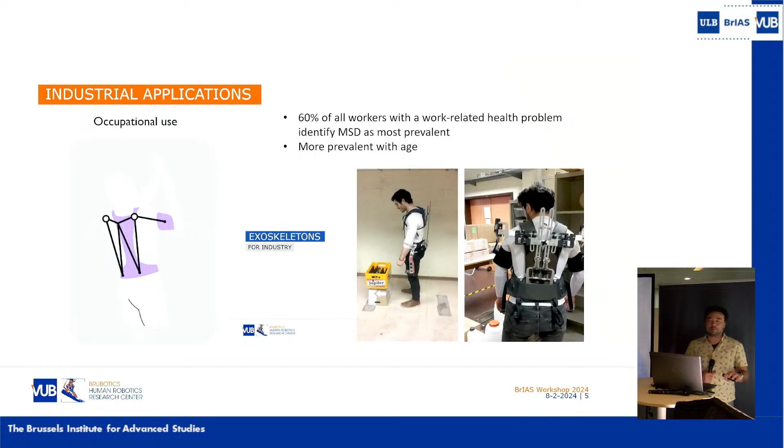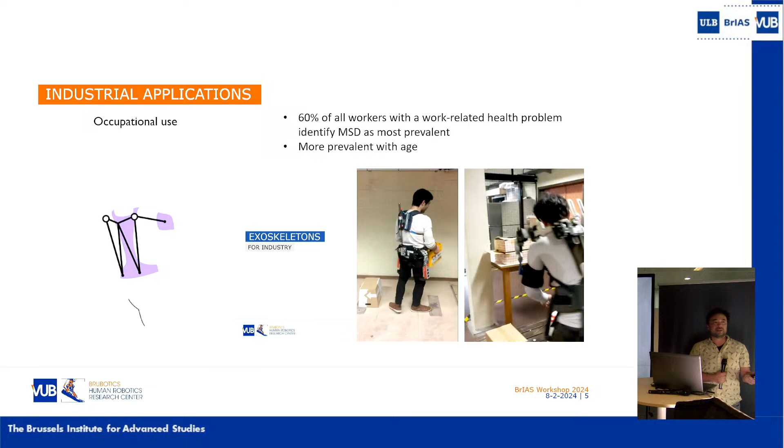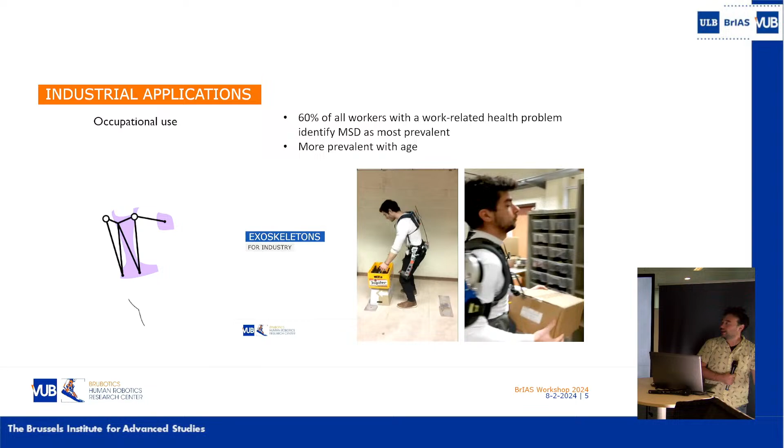So, the first thing I'd like to talk about are exoskeletons. We work on things like industrial applications - these two here, one is the back exoskeleton and one is an upper arm exoskeleton. These are really for industrial applications, workers in the field that are going to be doing work with the devices. This is not where I primarily have been working, but it's something we have been doing for a while, and we have a spin-off that's going to come out of this work pretty soon.

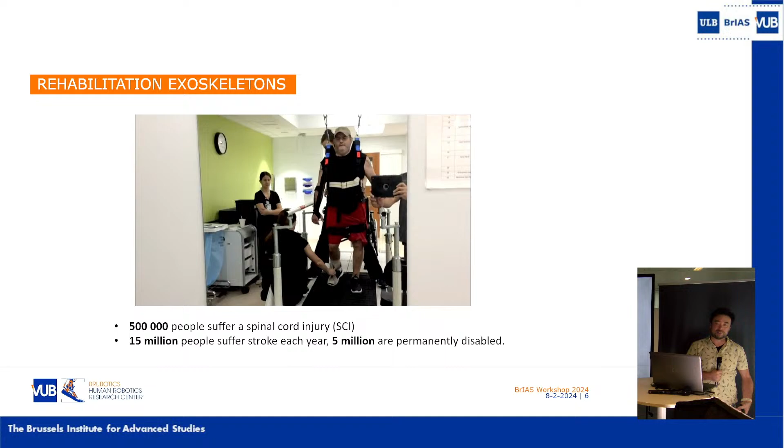But really, where I'm working right now is rehabilitation exoskeletons. A lot of people every year have problems, neurological problems or problems with muscle weakness. And the rehabilitation techniques used for these people are very labor intensive and costly, often requiring a lot of people to get very little result or little time with these people.

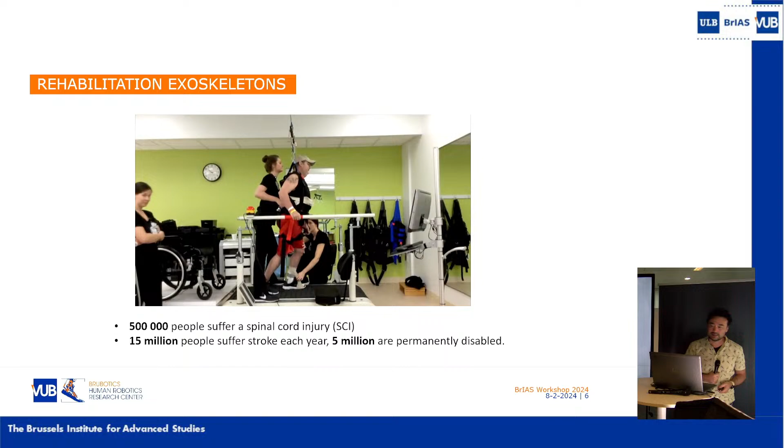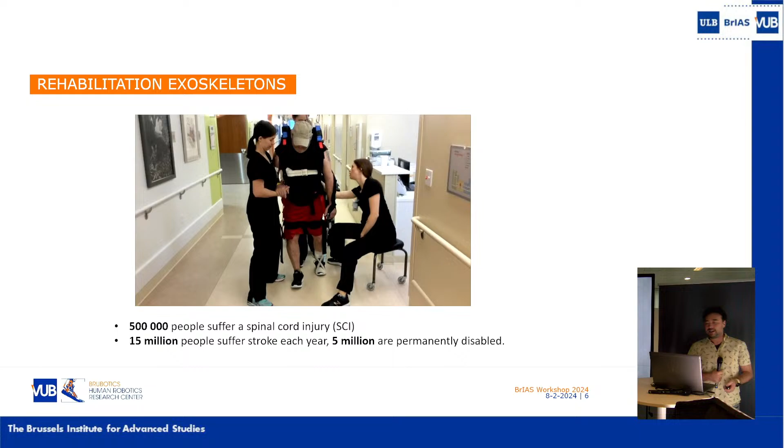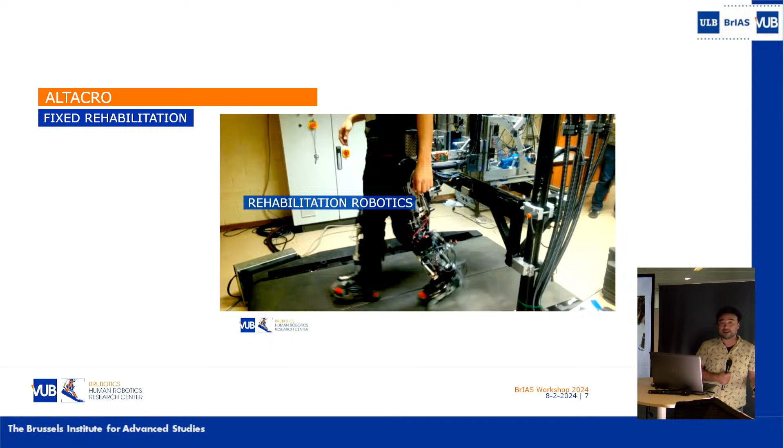You can see in some of these videos you have 2 or 3 PT workers with one individual for their half hour of time on the treadmill, and that's basically the rehabilitation they're able to get. So one of the first things we worked on at the lab were these kinds of fixed rehabilitation devices, exoskeletons that would be able to help a person ambulate who might not be able to, replacing the need for so many individuals looking after people during rehabilitation, and also upping the number of repetitions people are able to get.

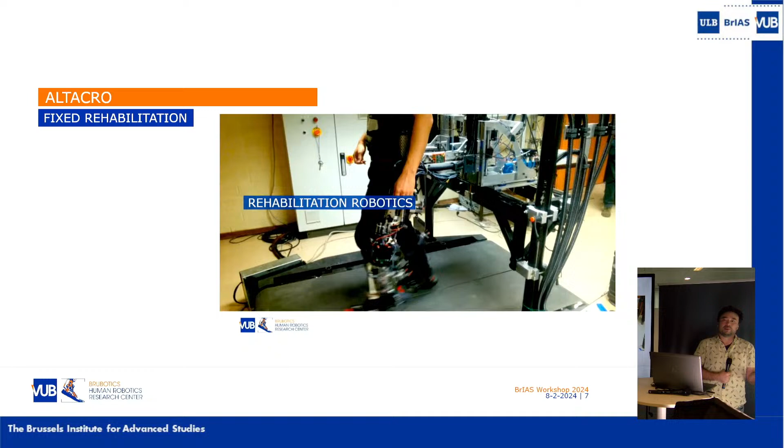This one is called Altacro, but you can see it's very hard to move from this to something that's actually useful in daily life. This is something that would be for a clinic - you would treat people in it.

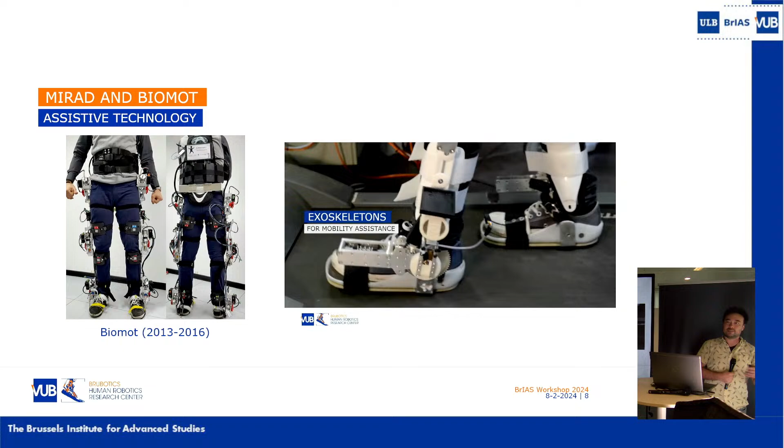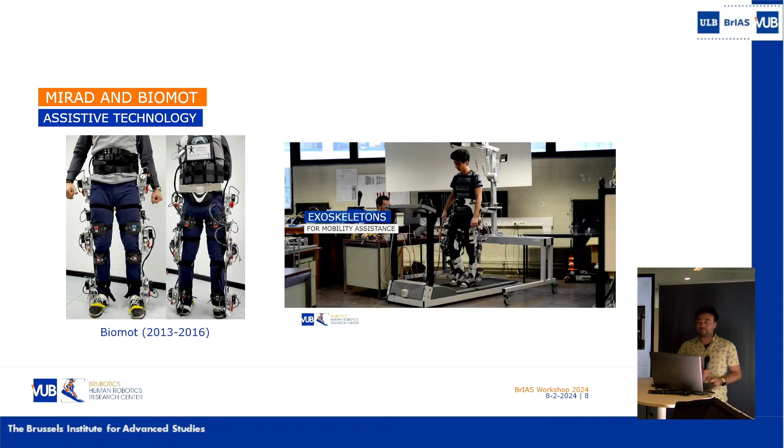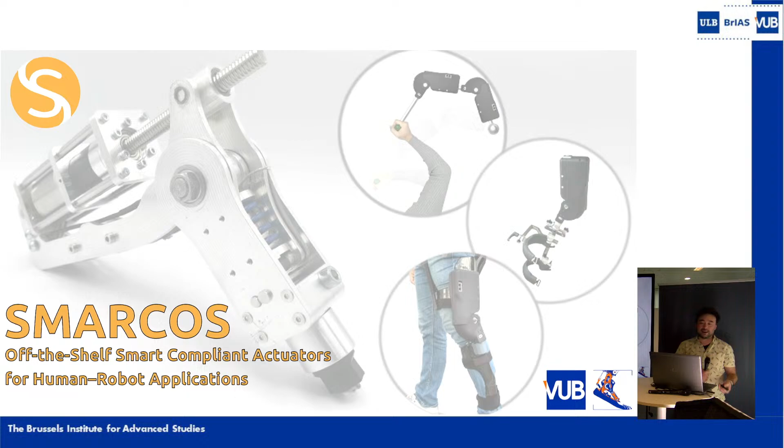We also work on different actuator technologies. We have a general purpose SMARCOS actuator, which was used for a number of different applications in rehabilitation - here we have an arm rehabilitation device. One of the things about all of our systems is that we really believe in having series compliance, natural compliance in your system, to better interact with the person.

So we deal a lot with designing actuators that are made to interact with humans while they're going through their rehabilitation scenarios.

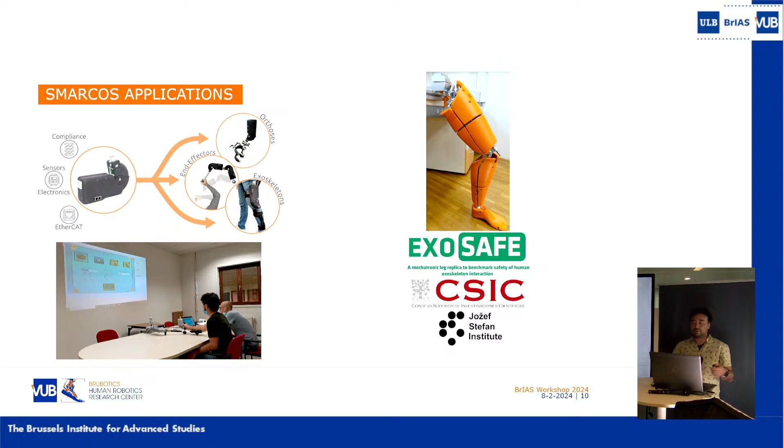Currently we have a new project called RevalExo, which we're trying to solve some of the problems of our previous devices, but also this one is intended to not only do rehabilitation for a person, but to also provide assistance at the same time.

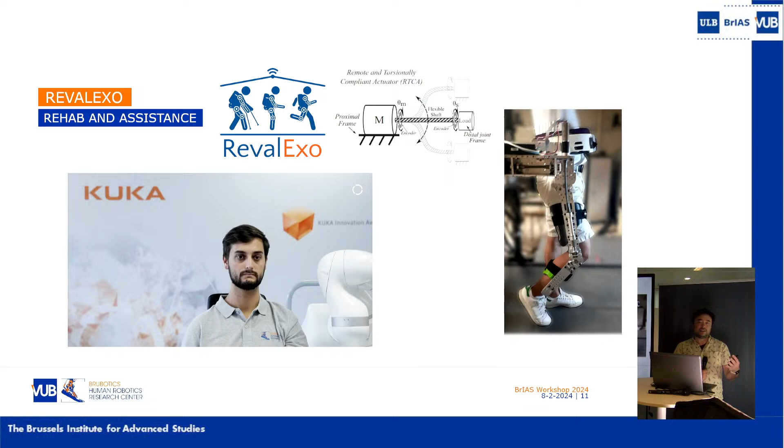So we'll have one that, for example, for sarcopenia patients whose muscle decline will definitely get worse over time, and that's just a matter of time. So they might need assistance at the beginning that's very light, but also because they can rehabilitate at the same time, they can keep their muscle function for a longer period of time as well with our device. At least that's the idea.

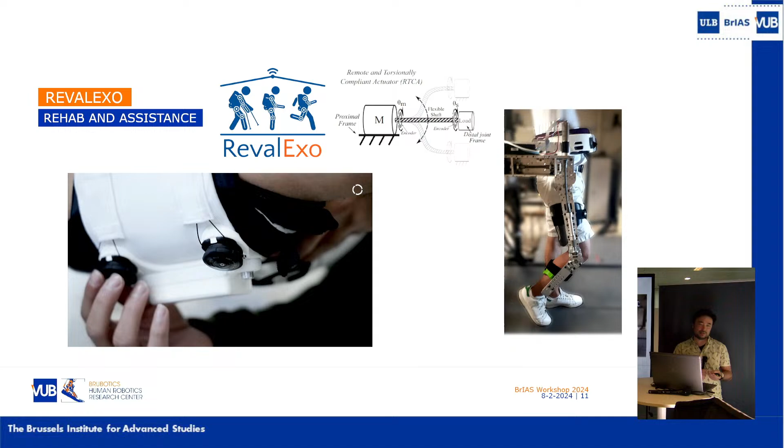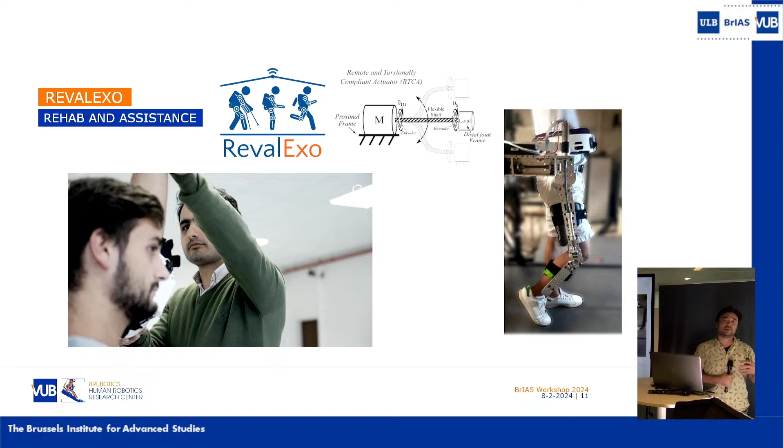So we hope to help individuals retain muscle function for longer by using it in a rehabilitation scenario as a resistance trainer. And then eventually a more assistive role will become of our device.

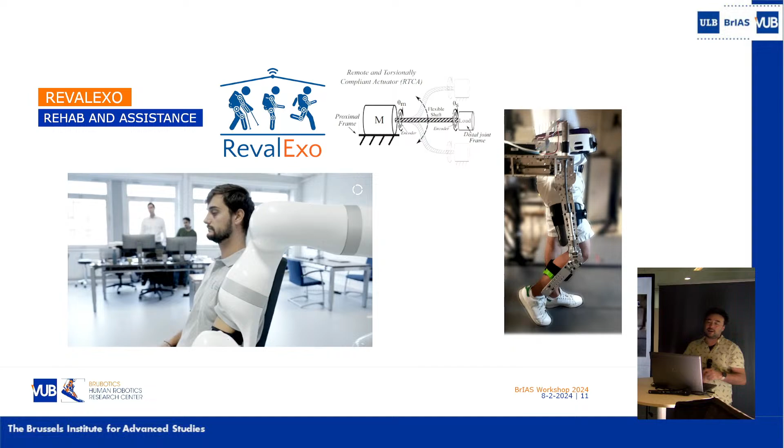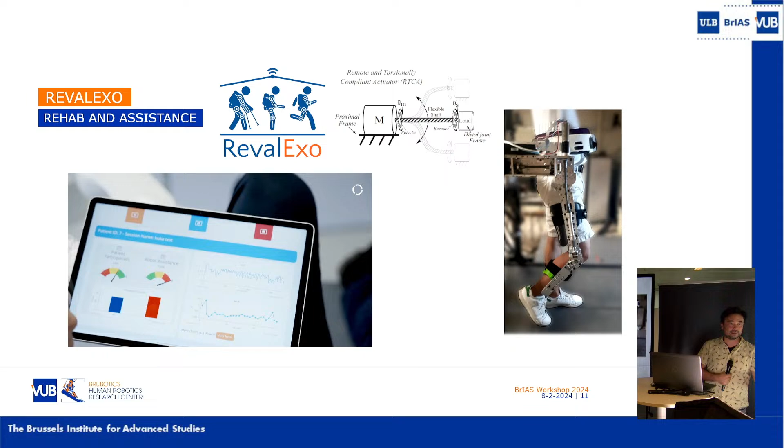So we have a number of different systems that we're looking at to incorporate in this RevalExo exoskeleton. One of them being the remote cable transmission, seen up here in the upper right. We implemented a version of this on our stationary exoskeleton, but it allows us to play with where the position of mass is on the person. So we don't have our mass very distal on the legs, which can be very tiring and give people problems. So it can move a lot of the electronics, a lot of the weight to their waist while operating at distal joints like the knee and the ankle.

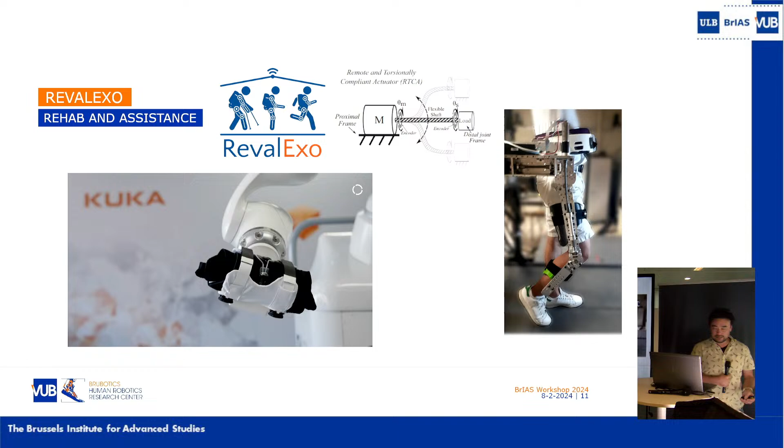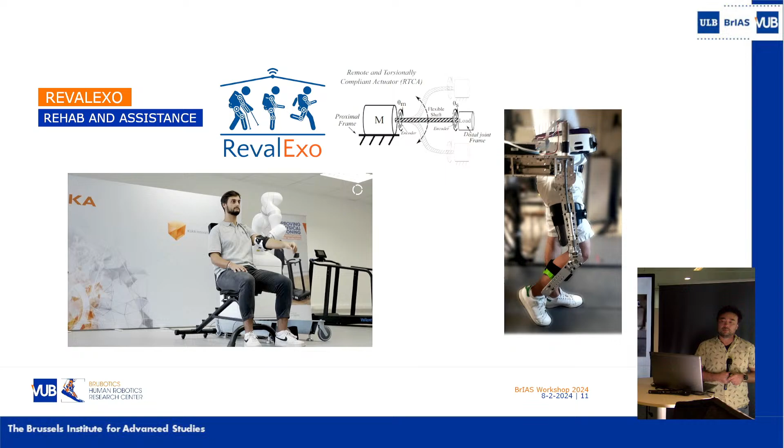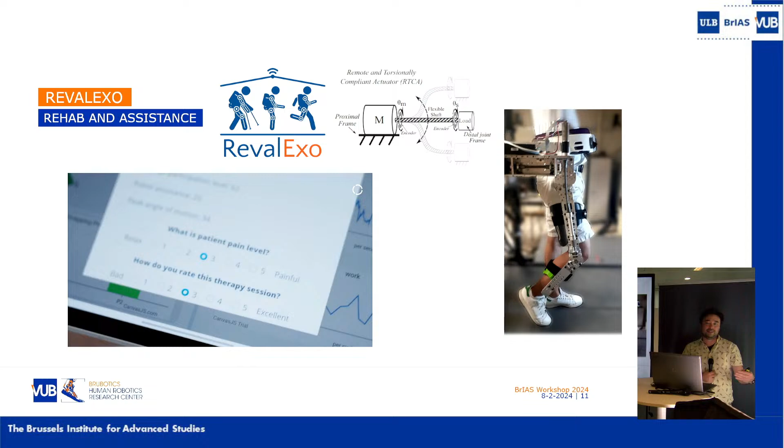Another thing that we're incorporating into our project here, the video you're seeing is from SAFER. It's a project that looked at the interfaces between the person and the robot. In this case, they're looking at it for measuring how the robot is pushing on the person. And we're trying to incorporate these kinds of sensors within cuffs in order to better provide assistance with our exoskeleton, so sensorized interfaces.

Yep, we also have prostheses. So prostheses is another large section of our work here at the VUB.

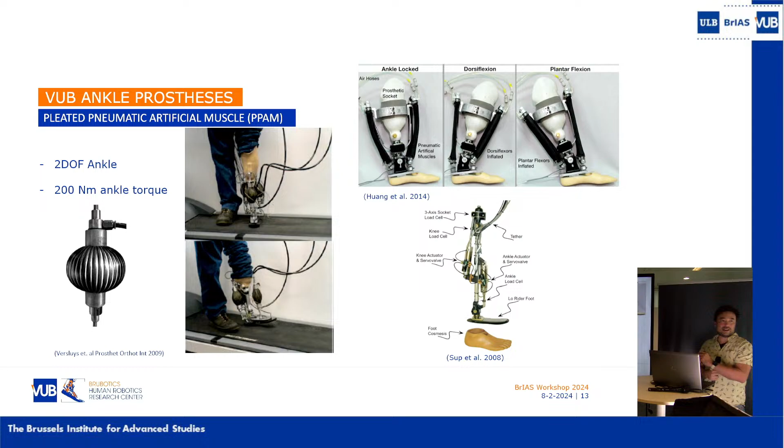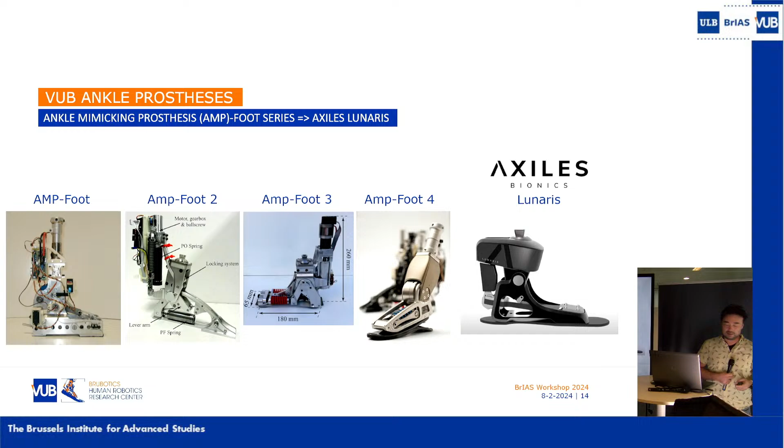And in fact, it's one of the first things that was done here. A long time ago, they were working on pneumatic actuators, and they built a pneumatic actuated ankle prosthesis at that time. And this kind of grew into what was known as the AMP-Foot line, which led to our spinoff called Axiles. And the project that I started here on, which was called CyberLegs, which is a full knee and ankle prosthesis.

So it's a full robotic prosthesis where we would play around with things like energy transfer from the knee to the ankle, different actuation techniques, such as using what we call the MACCEPA actuator, which is a variable stiffness actuator. And so throughout the CyberLegs project, we came up with a series of different prostheses in order to explore different ways of interacting with the person through replacing their leg.

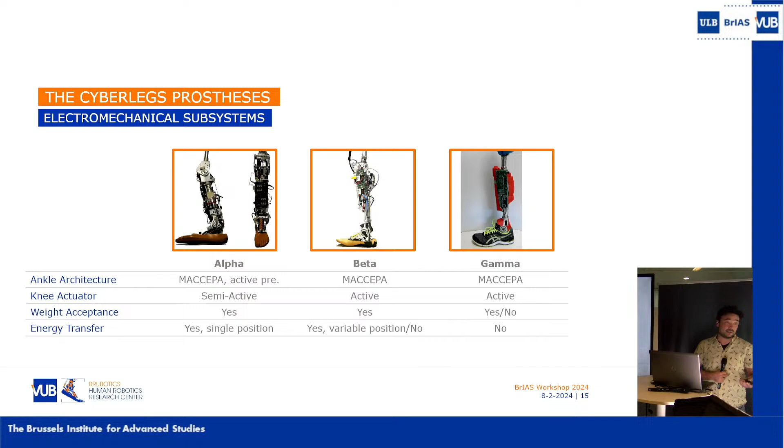So the current design is the CyberLegs X-Leg, our most recent design. But the idea was to simplify a lot of our older CyberLegs devices by replacing, for example, the 2 springs in our ankle with a single spring in the ankle, but being able to change the stiffness of that depending on the configuration of the ankle by the mechanics alone.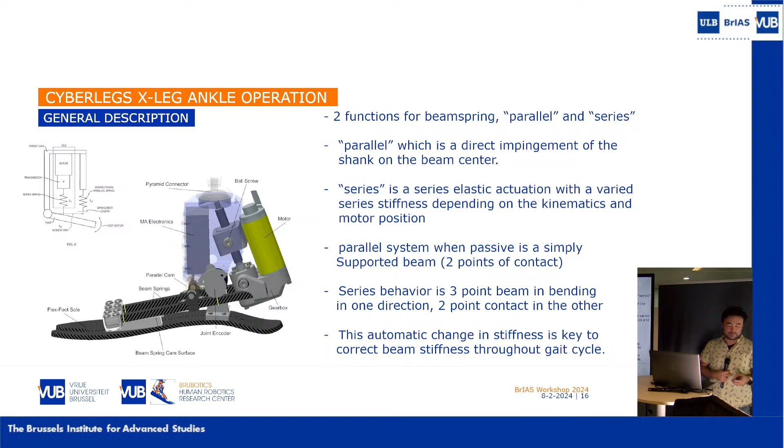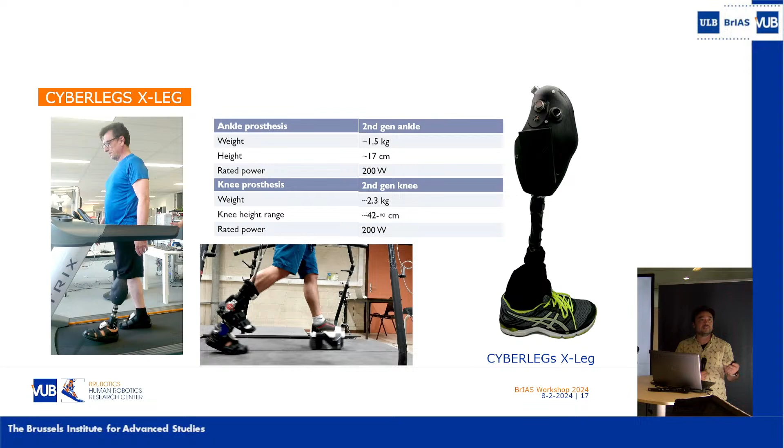So we have a fully active ankle with our device, and we were able to reduce our weight by quite a lot. So we have people walking with this device as well, and so we're able to reduce the weight of our device and provide very similar behaviors as previously.

So our knee is a new design as well. This is a much simplified design compared to our previous designs, and it utilizes a 5-bar linkage in order to get varying gear ratio across our motion.

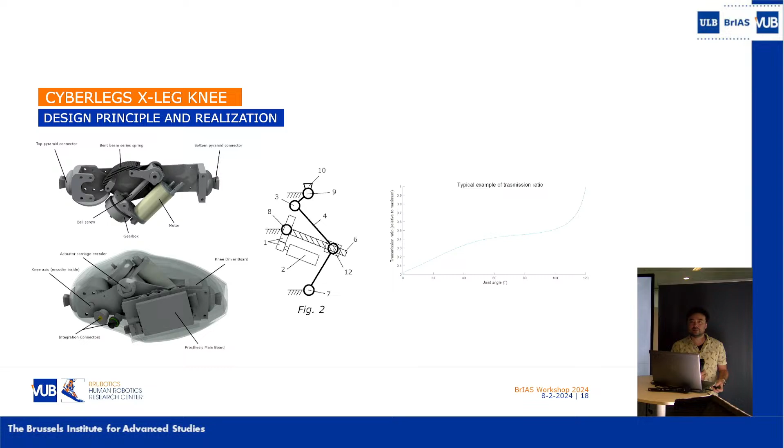And the major thing about this would be to provide very large torques while you're in flex positions, and very high velocities, relatively, when your knee is extended, with the same motor. So it has a variable gear ratio built into the mechanics of the design. This would help for things like sit-to-stand and stair climbing, where you need very high torques in your knees, and also during walking or other leg swinging motions when you need high velocities to swing your leg.

So with CyberLegs, we had a lot of working devices, and we had relatively decent behaviors back then. And we actually brought this version of the device to CYBATHLON in 2016, and in the future we want to bring the new version of our X-Leg to CYBATHLON as well.

Another thing we work on is the control of these devices. Control between the prostheses and the exoskeletons is very similar in a lot of ways. One of the easiest ways that we've been controlling our devices is through threshold-based state machines, finite state machines.

This is a finite state machine for gait initiation and walking, and as you can see, there are a lot of parameters. These parameters for our state machine we generally had in the past chosen by hand. We would pick out certain points in the gait cycle and tune positions and velocities for triggering our state machines. This is a very labor-intensive thing to do, and we want to replace that with other methods.

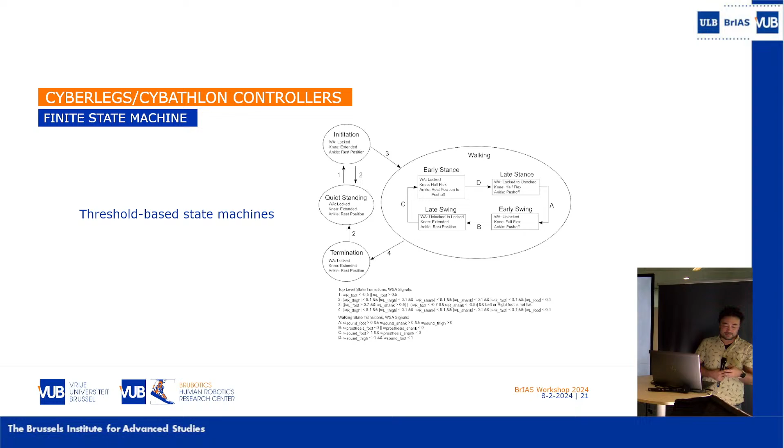One of the other methods we've been looking at is phase-based signals. You find a periodic motion or behavior within the task you want to do, and you apply a phase detector to determine where you are in that phase. Then you can apply a certain torque trajectory, velocity, or impedance value to the controller of your device, in this case using a lookup table where we apply specific torque to the device by looking up a torque position. If you guys want to talk about this more later, I can make it much clearer.

But this is one way to get a continuous signal that you can use over the entire range of motion for that specific task.

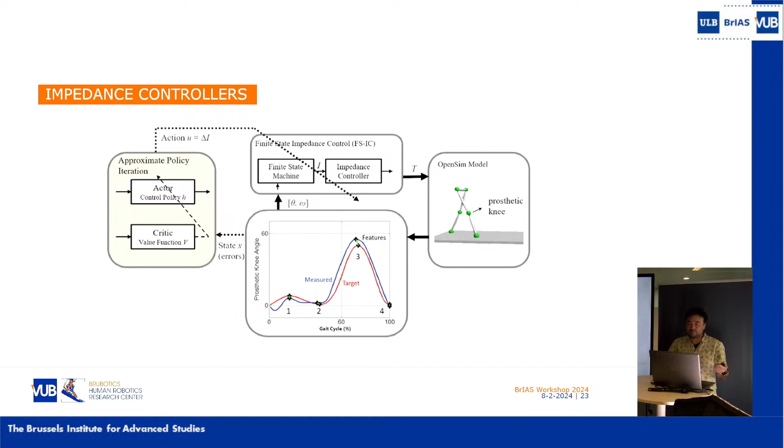Another way to do this is from Helen Huang's group. What they did is utilize reinforcement learning on impedance controllers, and they chose specific points within the gait cycle, those four points down there, to change impedance parameters of their controller. Once again though, these points that they choose are kind of by hand, and you have to have experience and know your task in order to choose these points at which to optimize. It takes experience, and it's actually intensive to do because you need to know these things a priori.

So one thing we've been looking at is trying to do human-in-the-loop tuning, which means you take a person and measure some kind of biological output from that person in order to optimize your torque trajectory or position trajectory of your device.

What's kind of funny, as an aside, these devices were done with prosthetic simulators and exoskeleton simulators that were off board. Actually, in 1972, they were doing the same thing. They built a prosthetic simulator which was able to measure EMG and kinematics and a lot of different things, and apply new trajectories to the person in order to optimize their gait.

So it's kind of like what's old is new again. But we have better ways of doing this optimization now, so hopefully we can actually converge in a better way.

Like I said, we're looking to go to CYBATHLON in 2024, this year, which is at the end of the year, in October. If you're not familiar with CYBATHLON, it's modeled after the Olympics, but with a number of different events which highlight a certain assistive technology in order to complete a task or race through an event using this technology.

So this year there are 8 different fields, things like lower limb prosthetics, upper limb prosthetics, wheelchair races, and functional electrical stimulation bike races, where they have a person who's fully paralyzed from the waist down, and they stimulate their muscles in order for them to ride a bike around a track. It's interesting stuff, but we're going to do the lower limb prosthetic race.

For this, we have a project called AIDWear, which is funded by BOSA. We're looking at incorporating AI into our top-level control in our prosthetic devices at this point. We're looking at more unstructured environments, trying to create controllers that will apply to a wide variety of different motions through the use of AI. This is in collaboration with Liège, who is doing musculoskeletal modeling of the person wearing a prosthesis, and also KU Leuven, who's doing the AI-based controllers.

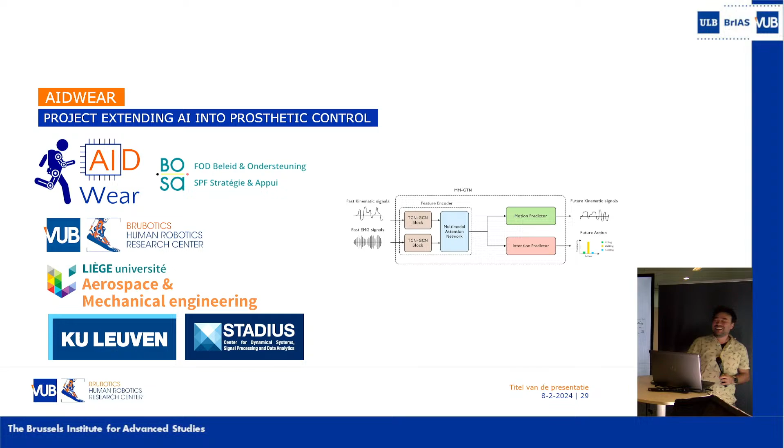What's nice about CYBATHLON is that it has tasks that are known but are relatively reasonable for a person to do during their daily living. So things like stepping on stones, or sitting at a picnic table and not disturbing the people next to you. But these things are not in the literature, these are tasks that are not well studied yet. So we can use our limited data set and gather a limited amount of data for all of these different tasks in order to try to build a controller that will work for all of them.

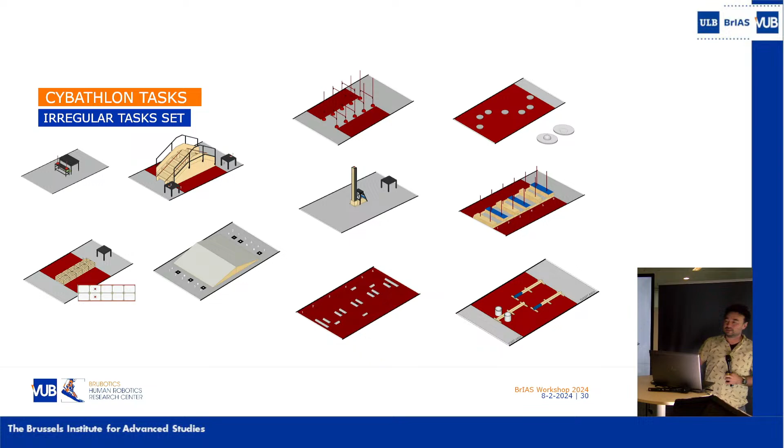So we're going to start looking at a little bit more unstructured behavior and trying to incorporate that in our controllers for our prostheses. Yeah, I think that's about it for this.

We actually are actively looking for the pilot of our device, so we need somebody who's actually going to come into the lab and wear the device during the competition. So if you guys know anybody who might be interested in this, it might be something that you could help us out with.

Excuse me. Yeah, so yes, please. Any questions? Okay, there are questions.

Thank you for your nice speech, and very clear. Just a curiosity — do you think there is such asymmetry in the behavior of one leg with respect to the other leg? I mean, it's possible to do online monitoring of what one leg does and apply artificial intelligence to have the artificial leg, for example, follow the other leg's behavior.

Yeah, so one of the first things that a lot of people try is mirroring — you measure the behavior of one leg and just play it on the other leg. That tends to not be a very good way to control a device. One thing that's weird is that when you look at symmetry in a person when they're walking, it's actually one of the best signals for that gait being a good signal. So there's a discrepancy between when you control somebody and force them into symmetry versus when they have symmetry naturally.

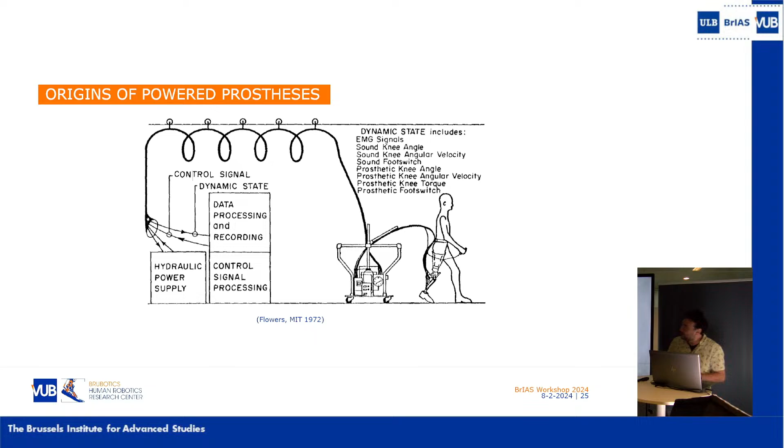Yeah, one of the things we have on our... man, what is going on? Oh, you guys don't even see it.

Okay, so what we have here is real-time user feedback. They can literally just play with the dial to say, I like this, I don't like this, or just give us verbal feedback. We oftentimes look for proxies though, like if their EMG is high, we think that they're requiring more effort, and that would be one thing. But psychologically, this is one way, you just ask them.

Yeah, so following up on this, the human in the loop, the feedback, you mentioned you use some actor-critic reinforcement learning method. I suppose you do a lot of online learning, so you learn from one person and they give feedback on the system. But initially I suppose there is a lot of error, which in this case may be a lot of pain and discomfort. So how do you adjust the learning to take this into account?

Yeah, you really have to constrict the regions that you're searching. In fact, a lot of solutions to that won't allow them to walk. So it's actually quite difficult. You really do have to do a lot of tweaking just to get a gait that works in the first place. That is a big problem, for sure. So you do start with a lot of error. You start with just a general guess, basically, and then constrict the regions that you optimize around.

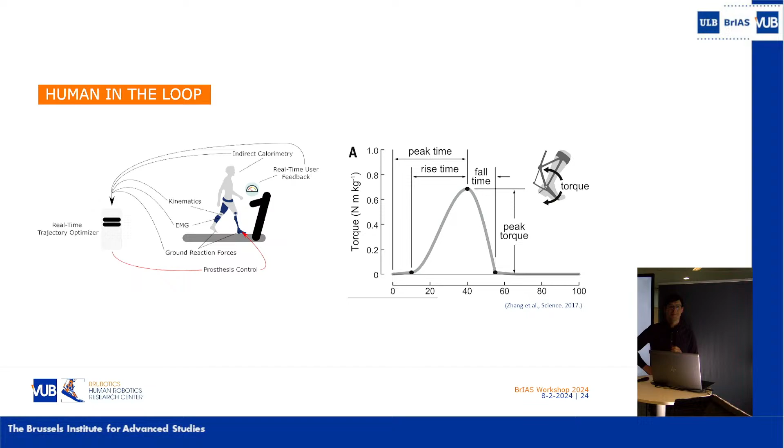And so we work a lot in our group, as you saw, on energy efficient actuation, which made it possible to go to the prosthesis and also to the exoskeletons. But of course, it's still battery powered, and batteries need to be managed.

And do we always need all sensors in it? And so that's the idea of Parham, to investigate energy management and battery management, because we have a lot of robots here in the lab that are battery powered, and due to Corona, the batteries died a lot, so it's not very sustainable.

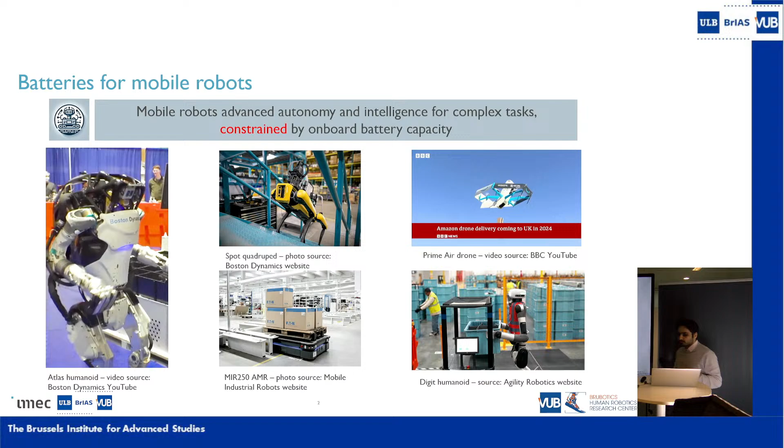So this presents a strict challenge: how do we extend the runtime of mobile robots without making them too heavy to perform their tasks? One solution, of course, is developing batteries with higher energy density, but achieving longer operational periods without increasing the battery weight is also a challenge.

Recently, some researchers in our group from Brubotics, including Bram and Tom, in collaboration with other groups in VUB, MOBI, evaluated the suitability of different battery technologies for different robotic applications. On the left, you can see they evaluate the importance of requirements such as specific energy, current variation, specific power, temperature, safety, cost, and lifespan of the robot in different applications.

They score these for the different battery technologies that they have. I've added the average value here in the table to show you that specific energy, which is the total amount of energy of the battery divided by its mass, has the importance and concern of robotics engineers. And for the battery technologies, it has the lowest score. So it's a big issue and problem.

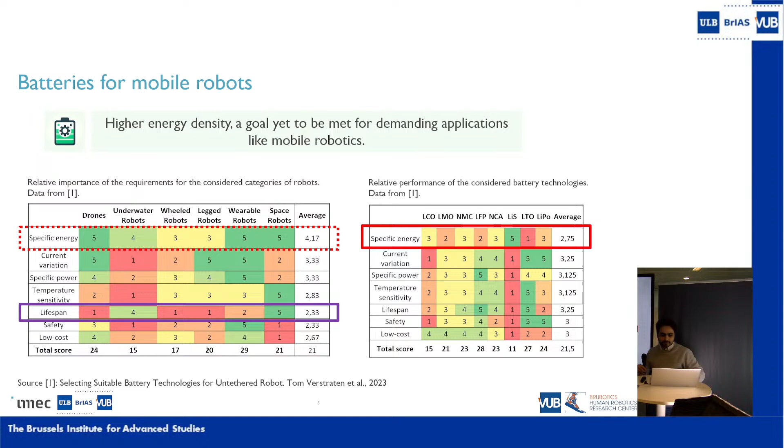Based on that, there are several additional technologies that can be added to overcome the inherent limitations of batteries, although often at the cost of extra weight, complexity of the system, and money. These technologies include battery management systems, which usually have the functionality of monitoring the battery voltage, current, temperature, or estimating the state of health or state of charge.

The newer versions of BMS are capable of communicating with other control systems in the robotic system. There are also thermal management systems and packaging, mostly about safety aspects of the robot. Also interesting is hybrid architecture, because high charge and discharge rates for a lot of battery technologies are not good. Having battery plus battery structures, or battery plus capacitors, can be a solution.

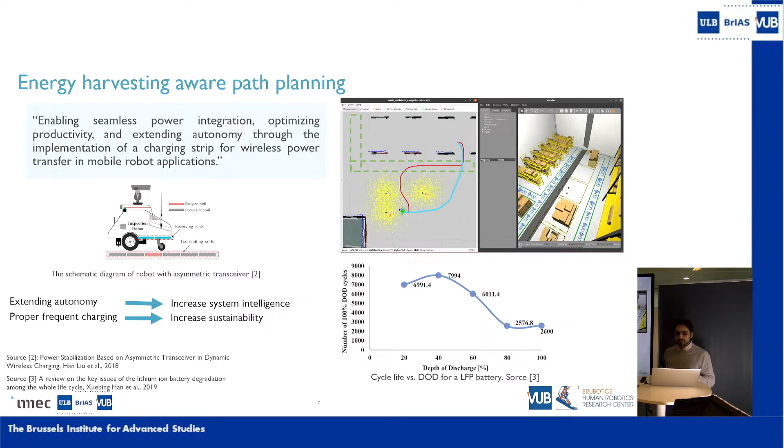The other thing we are working on is energy-aware task scheduling. In this part, our colleagues from Antwerp University are working on centralized and decentralized energy-aware task scheduling, and they are proposing a method that includes energy consumption estimation, charging contingency approaches, and energy harvesting prediction to minimize the overall task execution time. The scheduling problem is optimized using adaptive particle swarm optimization (APSO), PSO, and genetic algorithms.

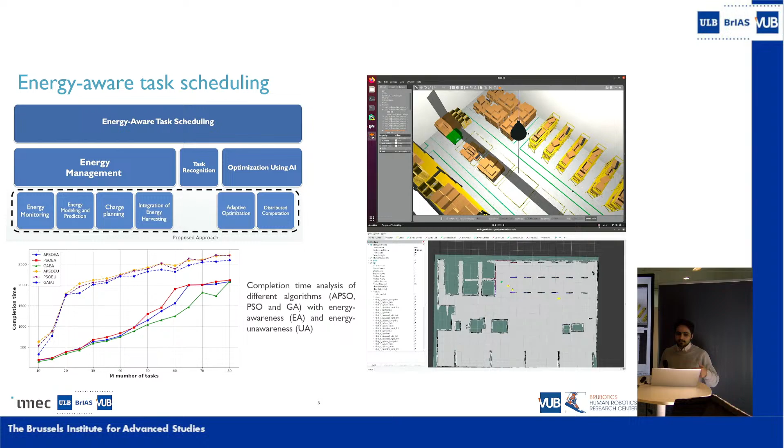In this chart, you can see that the completion time of the system when it's energy aware is less than when it's not energy aware. So in some sense, this is how we can increase the sustainability of our systems.

As I've spoken a lot about power consumption estimation in robotic devices, I also propose a hybrid approach for estimating the power consumption of mobile ground robots, which has three steps. The first step is the offline mass decouple coefficient estimation of the robot. Practically, we should run our robots with a full load and with no load.

Then, based on the equations and models I provide, we can find these mass decouple coefficients. In the online phase, when your robot is moving, for example in a warehouse, with a changing payload, you can estimate the payload, and based on that estimate the energy consumption of your robots. How does this fit into the energy-aware energy management system I talked about? It's because the second step of this approach does not need to be performed continuously.

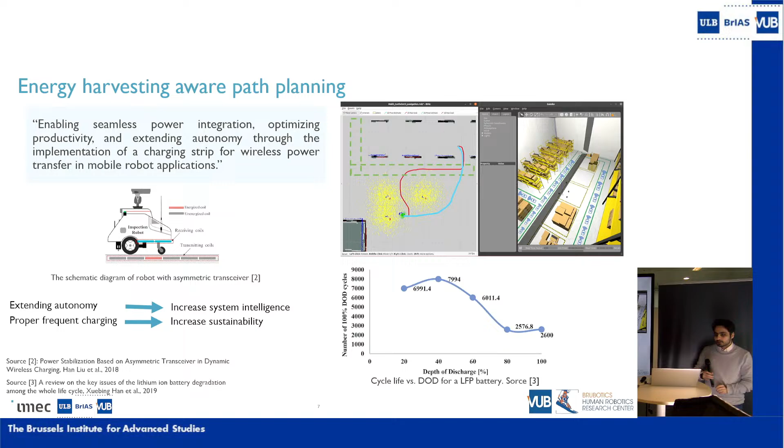And for the energy ratio in robotic systems, I think it's based on the different application, and maybe if you are more specific about which kind of robots you mean, we can discuss it.

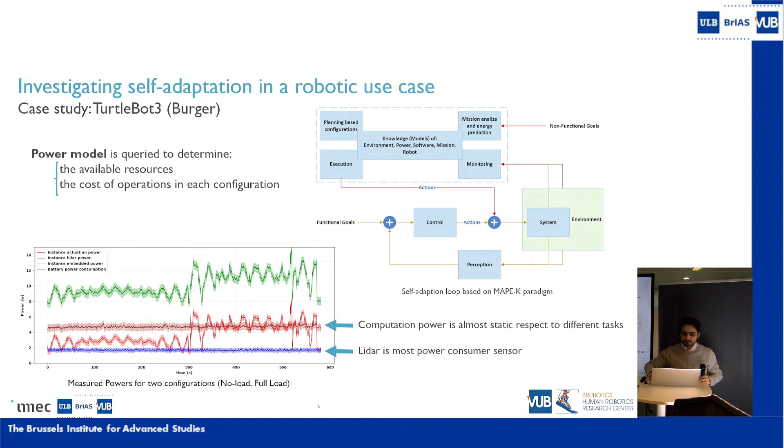Exactly. And second question is, in the last slide you talked about the accuracy of the system. This is very interesting because, of course, accuracy for us - I'm a metrologist - is a very important topic, but to achieve high accuracy you need to spend money, you need to spend energy, so you reduce the lifetime of the robots. But at the end, you mixed accuracy with error.

What do you mean exactly? Because they are two completely different concepts. I mean, you are talking about accuracy if you have no references. If you talk about error, you have the references. So in this specific case, what do you want to do? Thank you.

For me, in my case, I mentioned the error because we had the reference and we had the real measurements, and then we calculated the error of our estimation - it was based off that.

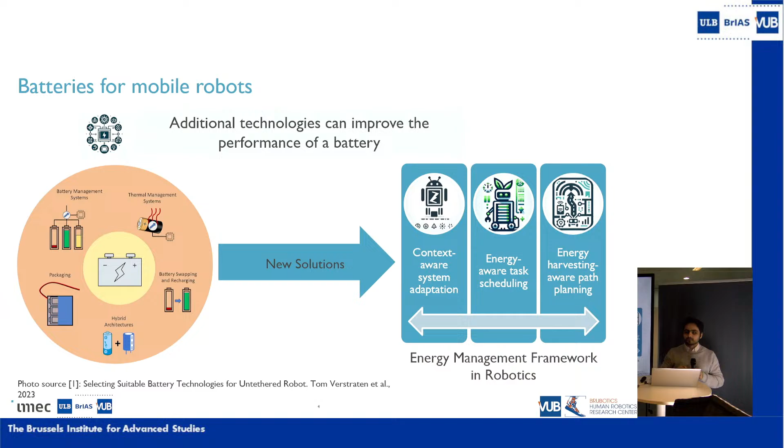Yeah, thank you for the presentation. You had at the beginning three different topics that you want to use for the better use of energy - it was like the harvesting and the battery management system. Was there any study or estimation done on which field could achieve the most saving? Because I imagine if you have a robot with sensors and actuators, and you switch off a few of the sensors from time to time, the gain is very limited. So was there any idea of which one would be the most efficient, or which one would yield the most gains in terms of saving energy of those three topics?

I didn't find an article or paper that compared these techniques together. But as I just researched, I think energy harvesting-aware path planning is one of the most effective for mobile robots, at least in warehouses or ground mobile robots.

But it depends on the technology that you are using and the different application. If it's wearable robotics, it will be totally different, because there you do not have the harvesting, and then you should optimize the configuration of your wearable device to optimize the power consumption of that.

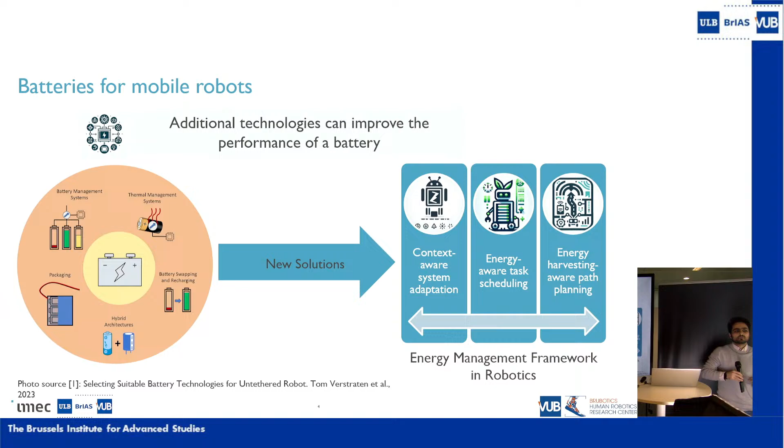Sorry for coming again, since Professor Blanc raised the topic. We are clients of the batteries in this case. I was wondering, how are we choosing the batteries in this case? Can we state that the battery is not lasting long enough if we are not choosing it properly? How can we decide that the battery doesn't have a proper lifespan if we don't know how to size the battery according to the application? Have you inquired about this to the users of batteries?

Just let me go back to maybe the first slide here. You mean here?

Here it's a part of the paper that Parham has, and in the second part of this paper they combine these two tables together and rank the batteries for different technologies. For example, LFP is usually the best one for mobile robots, but it's basically different.

I think it's on one side choosing an optimal battery technology, and on the other hand also having an optimized management of the battery. For example, I have an electric vehicle, and there it's rather strictly imposed on the user how to use it. I cannot always charge it fully, because then the battery will degrade, and the biggest cost of my car is the battery. So the second-hand value of my car is not the amount of driven kilometers, but the amount that is maintained in my battery. So taking care of the battery is becoming very important.

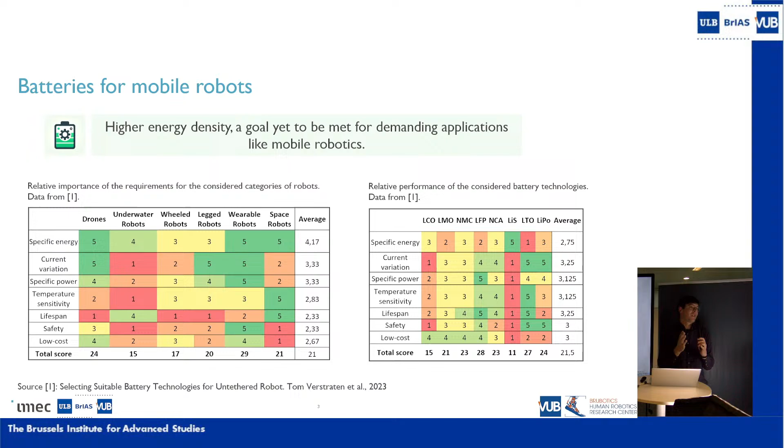You need more battery life, so you need more weight, more materials, more weight in the robot. To carry that, you need stronger motors, but stronger motors need more batteries, and you go in a negative loop. So that's the reason why we want to take better care of the battery, to make it more sustainable, because for a humanoid that can already only run a short time, if 80% capacity is only remaining after a few years, that has a huge impact on that robot.

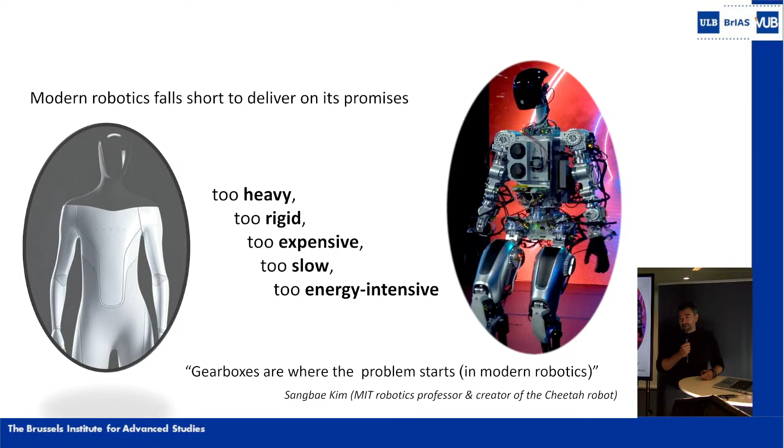What is the problem? Well, the problem is that we are using gearboxes that have not been conceived for human-centric robotics. That's the point. We are using gearboxes that have been conceived for industrial robots that move very accurately, very quickly, with very high payloads. But I like to make the joke, at my place things are not positioned within microns, okay? So that's an overkill. We're using a technology that is extremely good at positioning with very high accuracy, but our homes are messes and our offices too. So we don't need that, and it's very expensive to get that.

So we started from the idea - it's a bit also my background coming from automotive - you first understand the problem and then you specify what you're really looking for. That's sometimes a bit hidden, not what you thought was the problem at the beginning. So what we saw is that there are 5 parameters that are pivotal, in our opinion, for human-centric robotics.

The first one is torque density. Those of you who work with people know that better than me. If you went for a run this morning, your foot has been developing roughly the same torque as a Formula One engine. The difference is in the speed: Formula One engines turn at 18,000 RPMs, and none of you can make it past 120. So the power density of an electrical motor is very good.

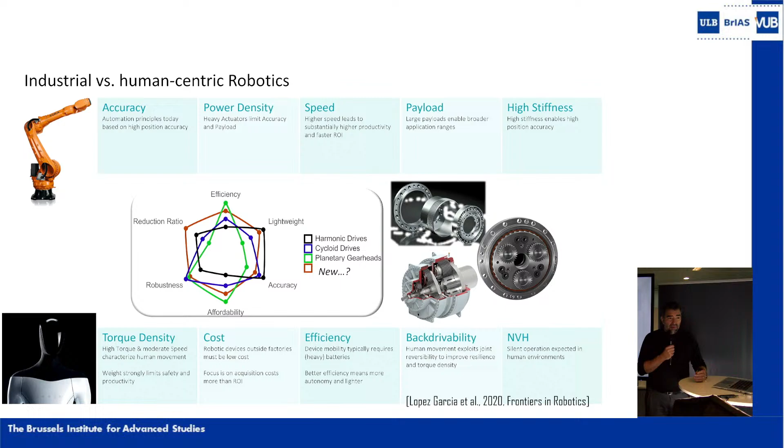Efficiency, we've had very nice presentations from Parham today about that. Back drivability, which I will also talk about a bit later. And noise. We're not anymore in an industrial setting where there's a lot of machines making noise. We may be in a concert room, we may be bringing our kids to bed, so it cannot be noisy. Noise is a very important thing also.

If we translate that into gears, it actually translates quite well. The requirements are very similar. For a gear, it means we need a very lightweight gear with a very high gear ratio. I'll explain what that means, but it's connected to the lightweight characteristic of the robot.

It needs to be back drivable, I promise I'll explain that a second time. It has to be very efficient, because we're basically depleting the batteries that our colleagues are so carefully charging so that their lifetime is good, and we just burn it.

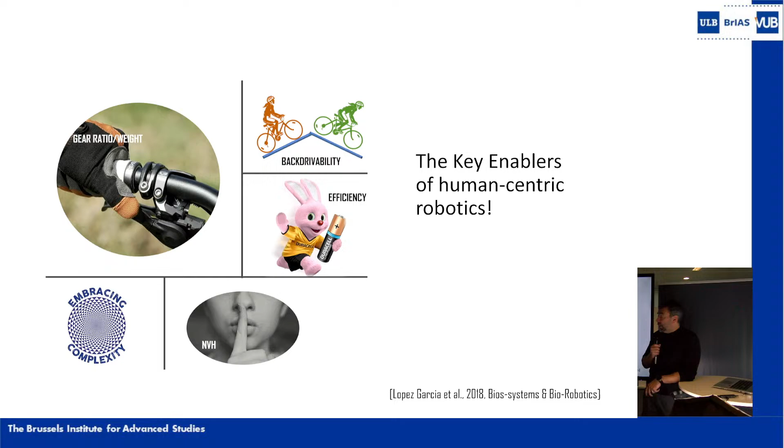Then there's complexity, which is basically linked to cost. If you increase volumes, like in automotive, parts which are complicated to build are expensive, and parts which are simple to build are cheap. So the way to reduce cost is to go for simple manufacturing. Then there's noise and vibration of the gearbox.

I'll go slowly through each of them now. Let me start with why weight is so important. Weight is important because if you want to be close to a robot like the one I showed before from Elon Musk, you won't feel very comfortable when it starts moving quickly, because it's a heavy beast. If it hits you, it's going to hurt a lot. So weight is very important, directly linked to safety.

But there's an effect called the compound mass effect, which we also see in planes, for example. Take a cobot: your actuators are mainly moving the robot and only a little bit of payload. The example here is a UR5 with a payload capacity of up to 5 kilos. Most of the time it's not moving 5 kilos, it's moving less than that. And the movable parts of the robot weigh 16.6 kilos, so you're actually using your actuators to move the robot and a little bit of payload.

So what happens if we can reduce the weight of the actuator, gearbox plus electrical motor, by 30%? All of a sudden your robot is lighter, which means you need lighter actuators because now you're moving a lot less weight. There's a chain effect: if you reduce the actuator weight by 30%, the outcome is you end up with half the weight of the robot to move the same payload.

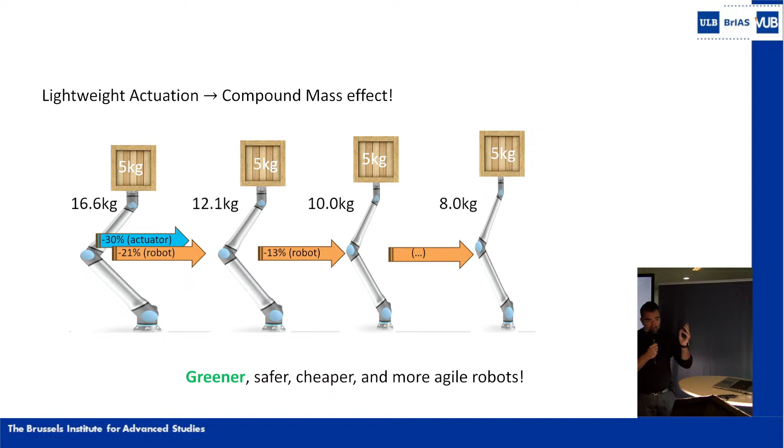So you're lightweight, but you're also more efficient, because the only thing that counts for efficiency is the payload you carry. You're moving less weight for the same payload. You're also cheaper, since you've saved half the material of the robot because the robot weighs half as much. So weight is the way. For me, weight is the first, second, and third requirement for human-centric robotics.

These are examples taken from catalogs showing this trend, this proportionality between a motor's torque and its weight — and efficiency.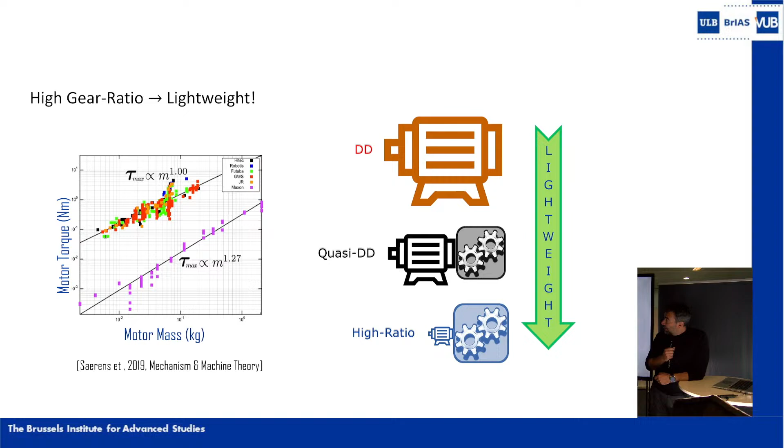Think of what we call the pocketing of the grease — the grease sits between the teeth, and you have to smash that grease so the force is transferred, which generates losses. There's also splashing of the oil or grease that you have to move as you move. So there are many sources of loss. The good news is we can focus mainly on the teeth, because the losses there are so high that all the others are not relevant when looking at high ratio gearboxes.

And that's what we did. We found there are two main components for the losses of a gear. The first is the efficiency in the tooth contact — the shape of the tooth, etc., so that movement is transferred with minimum sliding between the teeth. The second is something called the latent power ratio, which tells us how much relative movement there is between the gears. What matters for losses in a gearbox isn't the absolute speed of a gear, it's the relative speed of one gear to another — your losses are proportional to that.

Now, those of you with a mechanical engineering background, think about how you would make the legs and feet of this animal to reproduce this, to overcome all the impacts it's experiencing. How do animals cope with that? There's a lot that plays into it, but the main thing in terms of back drivability is we're not using just our feet — we're sending the energy through the whole body. The goat is using its full body, sending the impact from the feet through the joints to the rest of the body. Is that clear? This is a very important topic.

It has other important elements too. This is the example of the 300 Newton meters I mentioned if you went for a run — you're beyond 300 Newton meters, which is basically a Formula 1 engine. It's a bit more complicated, but we also use back drivability to achieve this very high torque in a very small ankle. So back drivability is also very, very important.

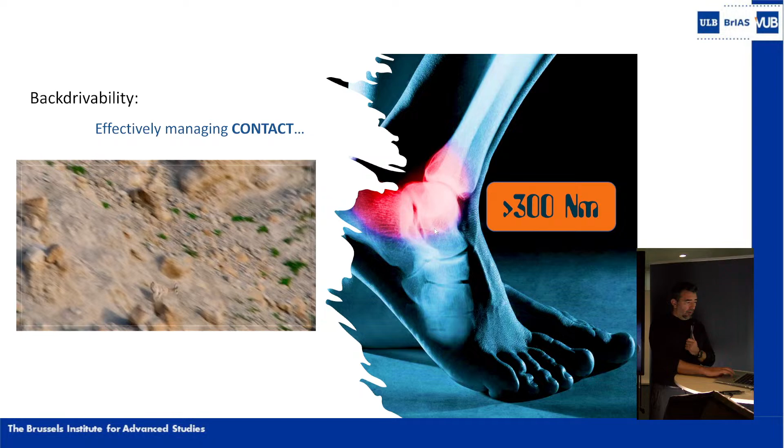I think he did not like the video. Oh, yeah, it's all on me. It's all no problem. We will be back.

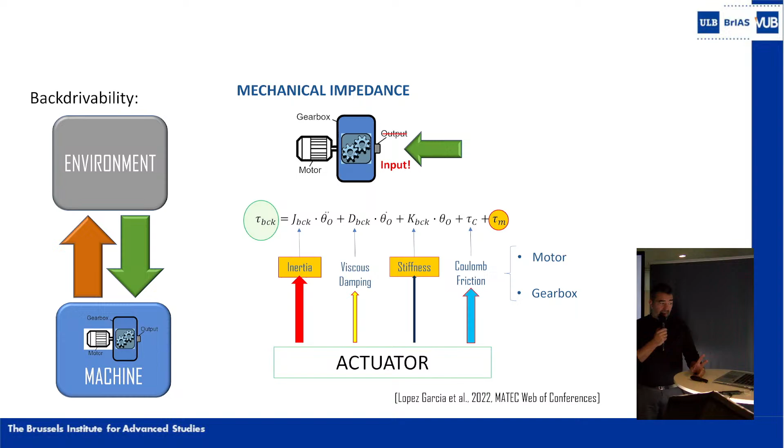Mathematically, it's a bit more complicated than on the goat, but the principle is there. It's what we call mechanical impedance, so you basically have to look at your equations of movement. That's how we called it as mechanical engineers. But the principle is that. And what is also interesting here is that the two main elements in this equation are actually inertia and stiffness, in the case that occupies us, which is gearboxes.

We're almost there, the next ones are a bit faster. Noise vibration harshness: when you have gears turning and meshing with each other, you generate quite a lot of noise. If you go to high gear ratios, which is how we solve the weight problem, and that is the problem, so anything else becomes lower priority, that means you're going to a higher frequency range of noise, which we humans don't like. We're not very objective in how we feel noise, but high speeds, we don't like them.

The good news here is that the car industry is facing exactly the same problem. As they took away the combustion engine, that was the big noise maker in the car, now basically they remain with gear noise as a main contributor in an electrical car. And so they are doing a lot to reduce that. So basically, our expectation is they will solve that for us, kind of.

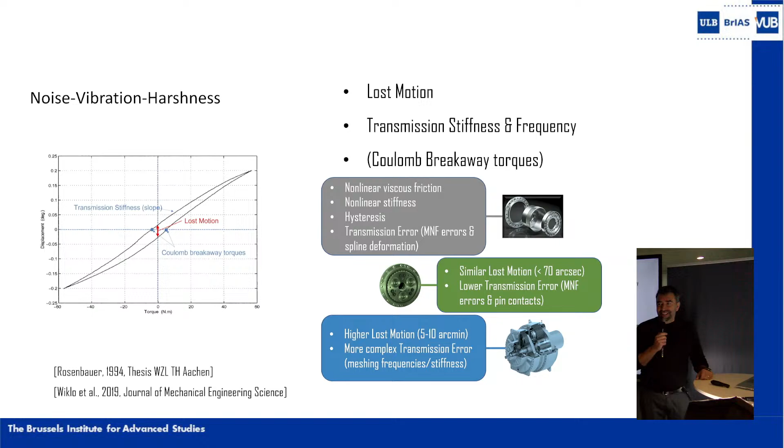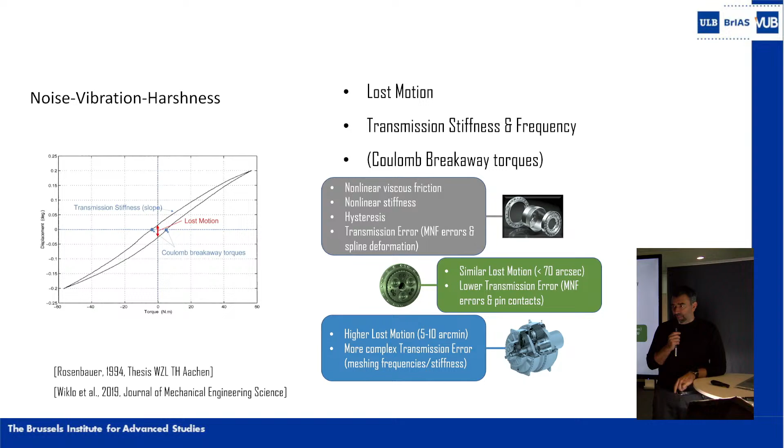Yeah, you can do a lot on the manufacturing. I can already tell you a bit: the idea is you introduce some textures on the shape of your teeth, and through those textures, what you do is you perturb these basic frequencies, and in this way you damp them in a way. So there's very creative solutions coming there.

Manufacturing complexity. These are the three technologies that you can basically use for creating high gear ratios. The cycloidal drive is what is used mainly in industrial robots. For us, it's too heavy, and I told you before, if it's heavy, it's not an option for me. So this one went away.

Harmonic drive is what you find in basically at least 90% of the robotic, human-centric robotic applications that you see. So if you think of humanoids, on the legs they may be using some other solutions, like Tesla for example uses, but most of the joints in humanoids, the practical totality of cobots, they all use harmonic drives. Very complicated, very expensive, so I didn't like it either.

And planetary gears have been around since 3,000 years. The Chinese were using them already 1000 BC. They built a wood chariot, they call it the south pointing chariot. It's an interesting story I find. It's basically a wood chariot that when it turns, there's a wood guy on top that is always pointing to the south. And when it turns, the gears make so that wherever you bring the chariot, it will always point to the south. 1000 years BC.

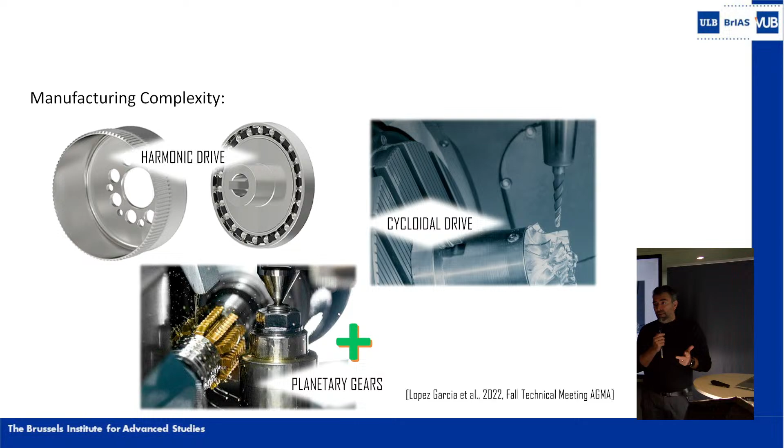So the good thing about planetary gears is that we know them very well. They have been with us for 3,000 years. You find them in the best masterpieces of engineering today: helicopters, submarines, they are everywhere. They've been with us for 3,000 years, they are extremely versatile, and we can make them cheap, effectively, and quick. So we said, this is the way to go. And this is the way we went.

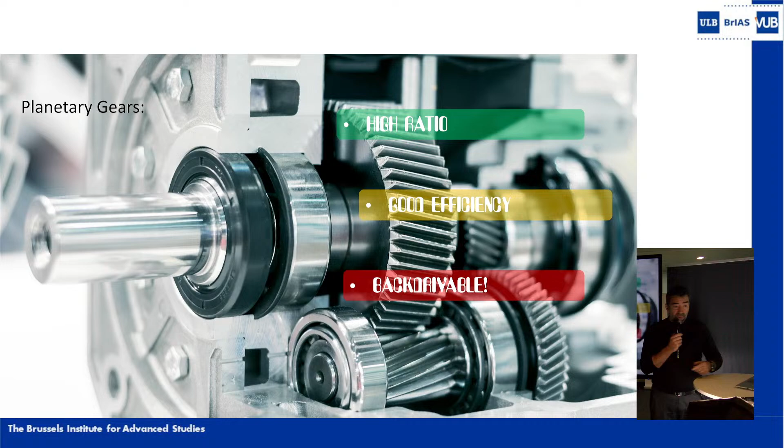We went for planetary gears because they can provide very high gear ratios. They have good efficiency, and they are backdrivable. In the last 7 years, we've built over 25 prototypes, quite some prototypes, from plastic to steel, to understand all how these principles work, etc.

We have developed a new technology, which is based on an idea that is over 100 years old. As Bram mentioned, a German engineer called Ulrich Wolfrom came with this idea 100 years ago. His problem was efficiency, and for us, efficiency was not negotiable, so we figured out a way around that problem, but we basically start from his idea. It's now patented, a patent that has been accepted. And that means we have lightweight, we have efficiency, we have backdrivability, and we have easiness to integrate.

It's a disc shape. We now have affordability also. Now we have quoted them for series, so we know they are affordable. And now we're building the prototypes so that in the second quarter of 2024, we can confirm where we are on noise, where we are on backlash. It's not critical for us, as I mentioned before. We are not aiming at position and accuracy, that's not how we move.

I explained that to my robotic, industrial robot friends and customers: if I approach anything, I use my eyes, so I have an accuracy of maybe plus minus 1.5 to 2 millimeters. But from the moment I have contact, I don't need my eyes anymore, it's force feedback. So what we have to be very good at is force feedback. If you have a very transparent gearbox, where I can basically drive from the output and the input turns, that means I don't need a torque sensor to achieve dexterity. I can use the muscles, the motors in my robot, to feel what the fingers are doing. This is exactly how we do it.

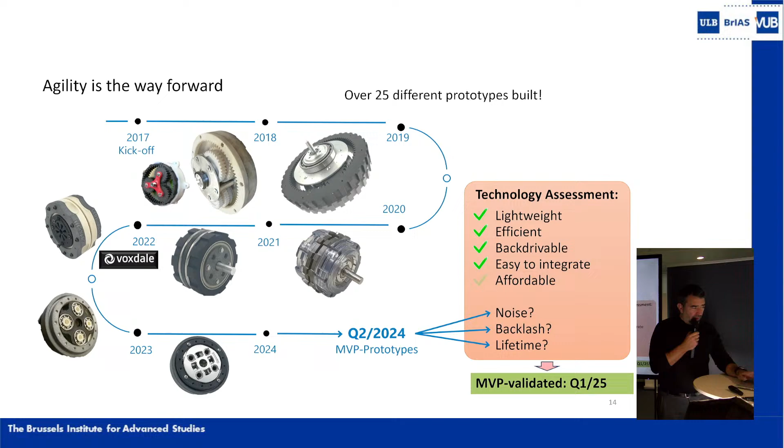How do you do that? If you're into gears, what happens in gears? Let me go quickly here, I'll try not to go too deep because I can enjoy that too much. Basically, compared to friction only, which would be the friction coefficient, in gears you have a form factor that depends on the shape of your gears. By playing with the shape of your teeth and deviating from conventional tooth geometries, you can optimize your teeth to improve efficiency.

Now, why is this important? Because if you see the latent power ratio, this relative movement between parts is a multiplicator. That's very interesting because in a normal gearbox you can achieve 98% efficiency. So you can achieve very good efficiency. The question is, would you make the effort to make special teeth to go from 98 to 99? Probably not. But if I tell you the LPR is 50, that means your losses of 2% multiplied by 50 gives you 0 efficiency.

And now you go to 99, so you have 1% multiplied by 50, your efficiency is 50%. That means a little reduction in losses, going from 98 to 99%, is a huge relative reduction in losses, and you have someone multiplying that by quite large numbers. So it's worth going the extra mile optimizing this geometry as much as we can, because every 0.05% we win is magic. It's fantastic, and that's basically the first part.